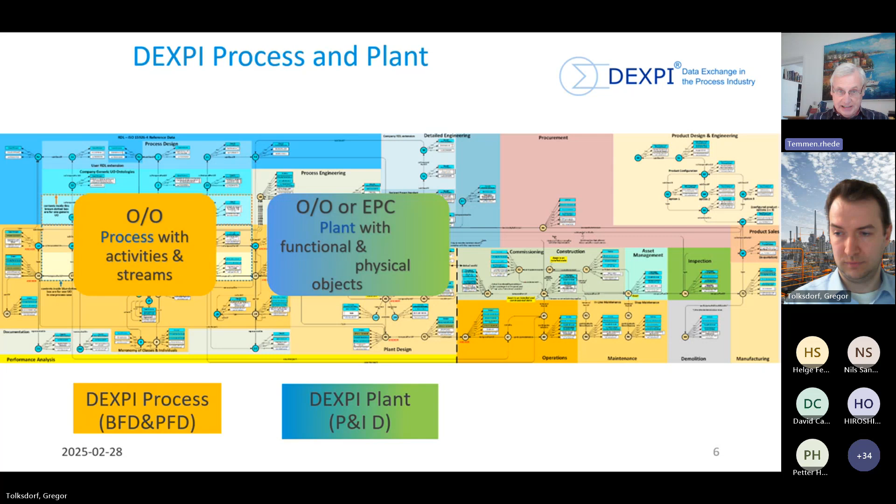Okay. That is what Gregor said, a view on the life cycle. That is a picture from the ISO 15926 colleagues, and perhaps Gregor, click. To the left, we see the process world with the activities and streams, and here we have the DEXPI process specification. In the middle, we have the plant world in a functional view and in green the physical view with our specification DEXPI plant for P&ID, where Gregor will make a deeper dive.

To the right, we have no DEXPI specification, but as Gregor said, we cover the whole life cycle. We have the world in purple of the assets, which were before products, and from the market we have the device vendors with their products and product models. That is our general view and the placement of the two DEXPI specifications.

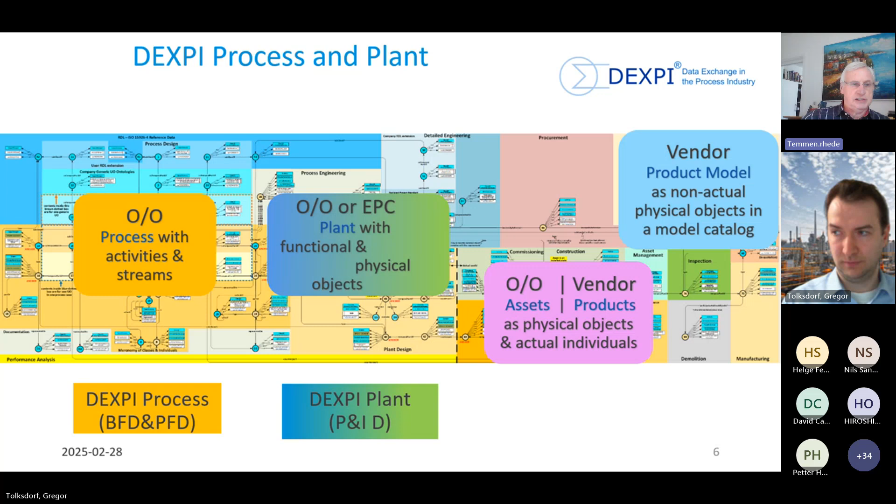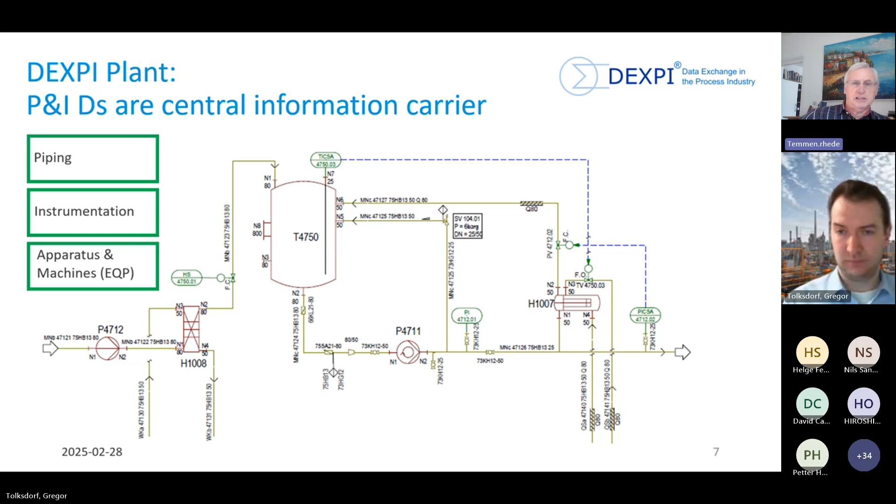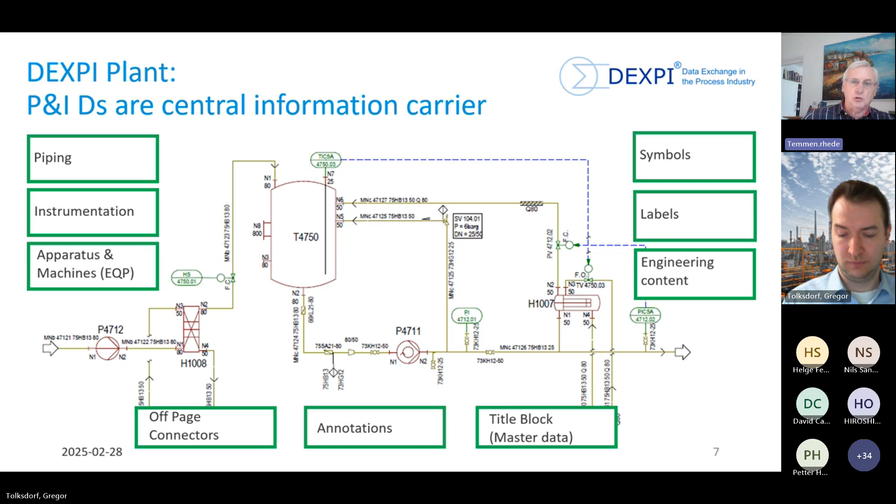On the next slide, it's a little recap of our world of the P&ID. Gregor, click perhaps. To the left, we have the three important topics: piping, instrumentation, and apparatus and machines. And we cover not only the world of the symbols and labels. The most important part is the engineering content with the taxonomy of the different parts, and of course the topology and the other stuff for P&ID at the bottom as well.

On the next slide, we see a little picture of the DEXPI process model. We cover here the block flow diagram and the process flow diagram with the new specification, and that is at the beginning of the life cycle, the process model, and to the right we hand it over to the plant model.

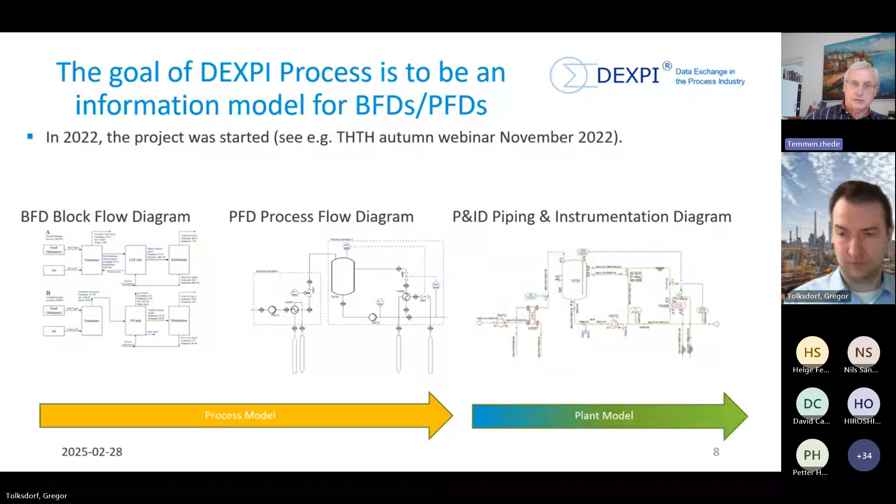And on the next slide we will see that this year these two specifications will be joined into one specification in the new release for, let's say, summer or fall this year. We will have a common specification that everyone can use, DEXPI Process and Plant together, or only one module of that. That's also included in the new specification, DEXPI 2.0.

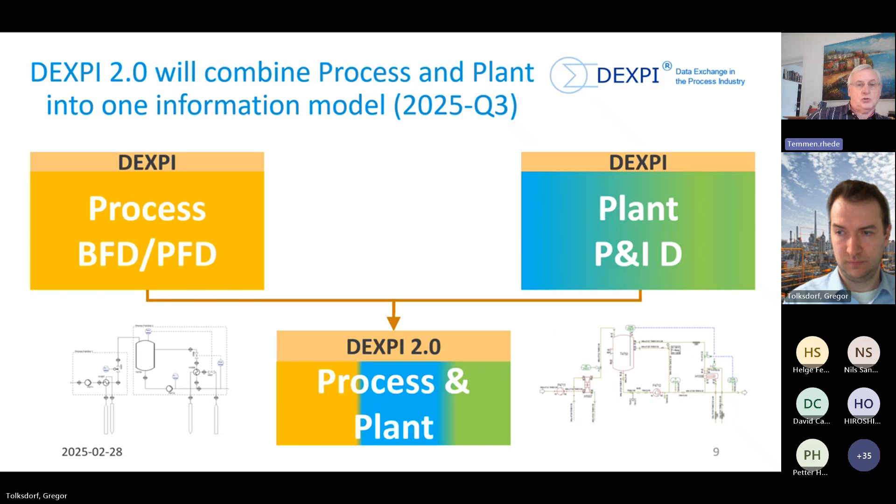And now let's have a look at the next slide on our alignment work. We heard in the last training sessions a lot about the different good approaches, perhaps from CFIHOS, from IDO itself, from DISC, IMF, or from STEP. And here we will show how DEXPI and CFIHOS work together.

We generated a common taxonomy for DEXPI Plant and for CFIHOS. That means if someone has a configuration from CFIHOS, he can switch over to DEXPI and vice versa. And let's go on the next slide a little bit more into the details.

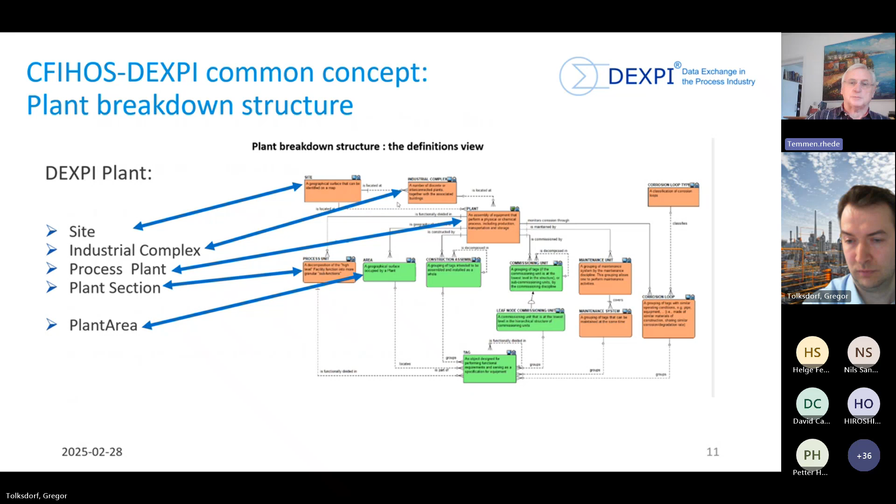With CFIHOS and DEXPI, we have a common breakdown structure. The important things are here on the slide: the site, the industrial complex, the process plant, the plant section, they call it process unit, only another name, and of course the plant area as well. And we have a system concept in both specifications as well. And we have common concepts.

Let's say we cover the same industry segment, the process industry, with a common view on the life cycle. We both use part 4 of ISO 15926 as primary RDL. We both cover concepts from ISO 14224, let's say the boundary concept as an important part and the maintainable item concept. We both use classifications instead of naming rules, and in both initiatives we have early involvement of the software vendors.

And in our first approach, we aligned these CFIHOS tags for apparatus, machines, piping and instrumentation into a common taxonomy with the DEXPI Plant specification. This one is ready, and the next step is verification of the DEXPI proposal by the CFIHOS team, and then we can publish the results, and we can use, as I said, this specification for use of both specifications, DEXPI and CFIHOS, in one software configuration, and we can switch from one to the other.

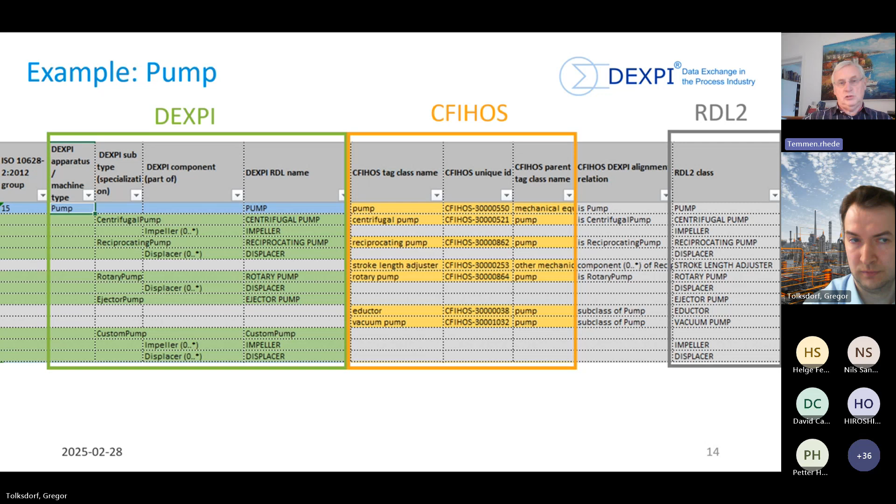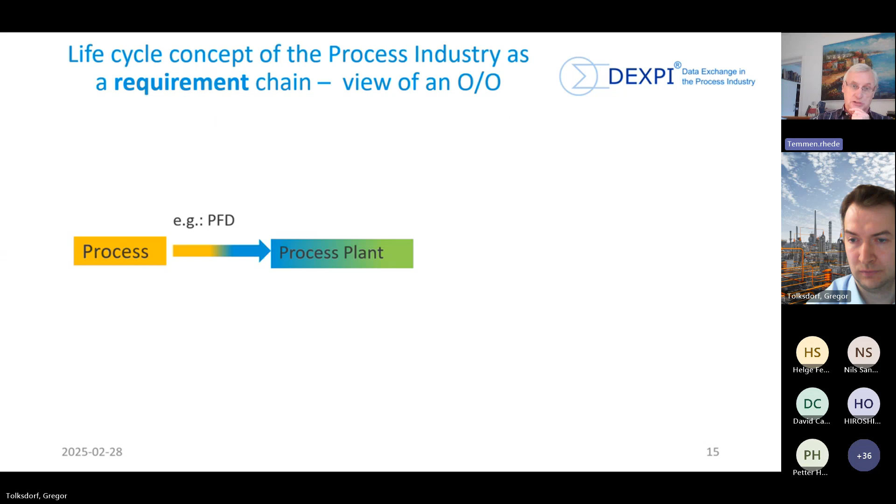And the next is perhaps a view on what the expectations are in the direction of IDO. This is a view on the life cycle as a requirement chain. We start with the process world, we then go to design the process plant, and later on we go with the specifications in the green color to the market and try to find the right products on the market. And if we have the right products, we buy these products, we inventory them as assets, and then we have the full life cycle as a requirement chain.

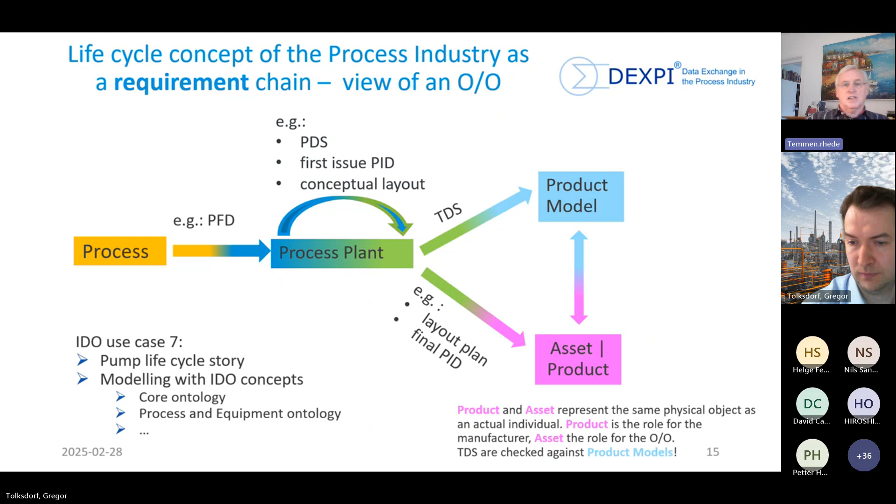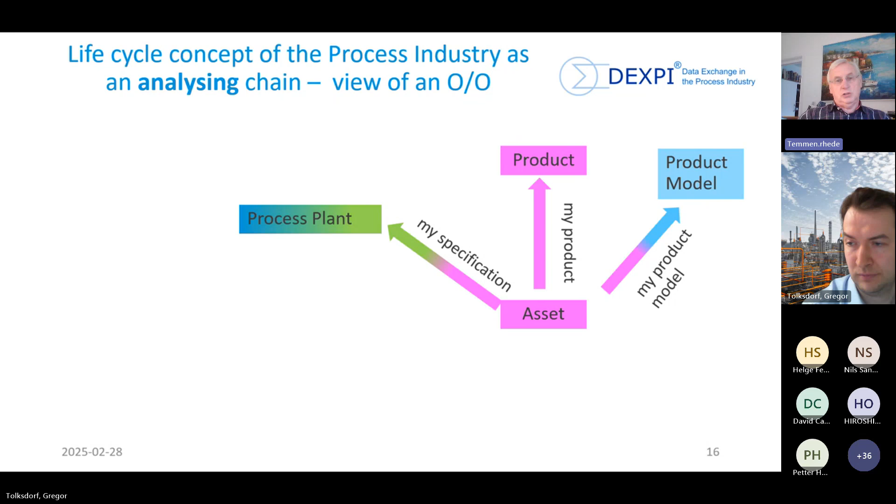And if we go vice versa, in the view of operating, we have it the other way around. And this is an analyzing chain. If something is wrong with an asset, we ask first, okay, which product was it? From which vendor did we buy that? Or which product model was it? And then we go back to our own specification from the process plant world. And if we go deeper back, then we can say, okay, what was my process?

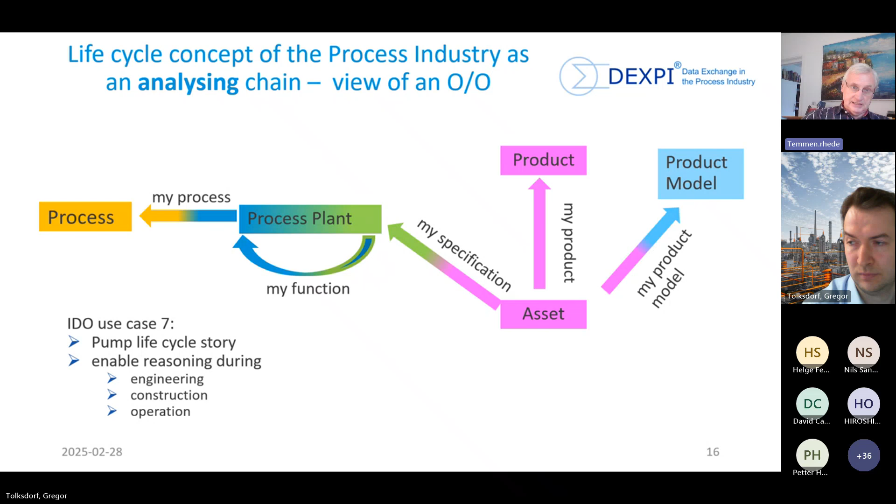And these two things, the requirement chain and the analyzing chain, are the things we try to cover with the IDO world. And we specified a use case 7. In this use case, we try to specify how IDO can cover this world of the life cycle view.

To the left, we see the process world, in the middle the process plant, and to the right the equipment or asset world. And if we have a look which specification is, we see, okay, we hope that in future IDO can cover this all.

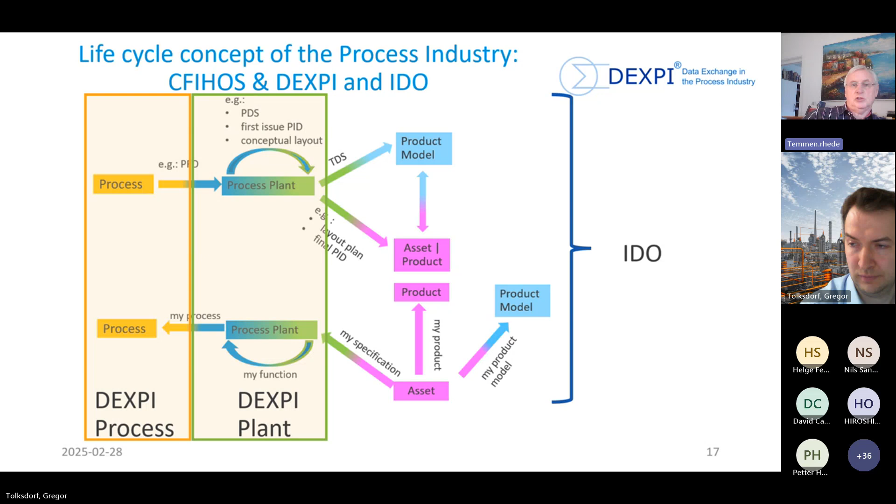To the left, we have the process world from DEXPI Process, in the middle from DEXPI Plant, and CFIHOS covers the tag world and the equipment world. That means the plant and the asset equipment world. And that is the part we try to cover with IDO in the view of DEXPI and CFIHOS.

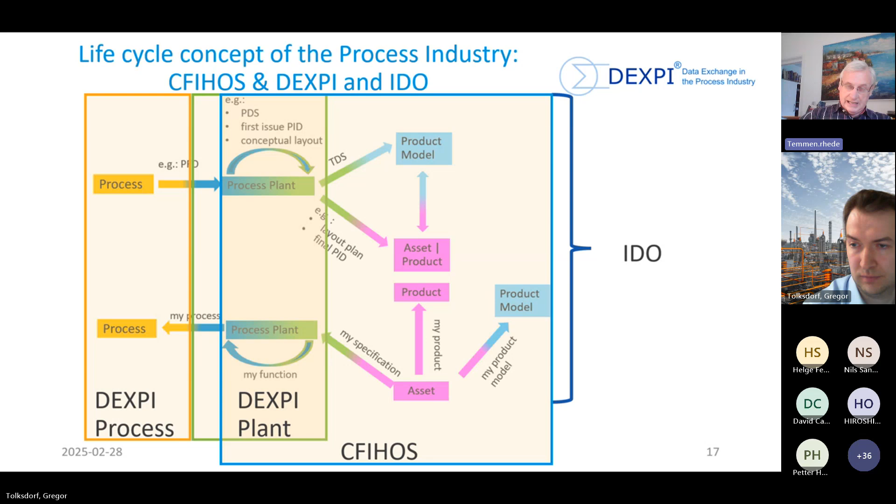And in the last training session, we heard something good about DISC and IMF. And if we had a look, we saw that the DISC colleagues had a view on the aspects function, plant, installed assets and products. Okay, that is the view from David. And I think here we have to answer the question, what are the relations to the process plant, to the asset, and to the product model. These things we have to bring into a common understanding.

I think that is important and we had questions after our last session. David has some questions, Torbjörn has some questions, how these things relate together. And I think that is a part we have to solve in the next weeks and months. That was a little view from my side, how we try to align all the different specifications we have here in the community, and especially in the view of the IDO training.

Back to you, Gregor. Yeah, thank you very much. I liked how you handled my slide update. Okay. Yeah, but we talked beforehand, so no issue.

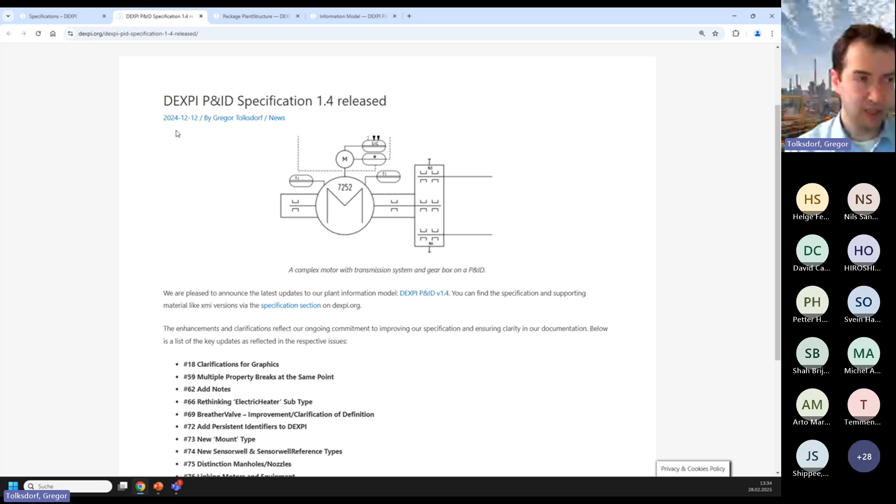What's the difference to DEXPI 1.3? Short answer, only little things. Some things are new. So when I go to the news of December, where we basically announced that we have released it, you can see what we did in the meantime. So since 2021, we had a working group of 10 to 20 people regularly meeting and addressing the topics that were brought up by the community. And each topic gets a unique ID or issue number, as you can see here with hashtags.

And more than 10, we discussed and came to a decision how to improve the specification, giving more clarification regarding graphics, adding a new concept for annotations or notes that are quite common, that do not address the engineering content as hard facts like a power of X kilowatt or a temperature of Y Kelvin, but giving guidance to the engineer. That is also a common concept of P&IDs, that you have notes to describe things that are not that standardized. Then improving some definitions, add persistent identifiers, add new concepts like a mount and sensor wells.

So different topics that came up from the community were discussed and included in the updated 1.4 version of the P&ID specification. For example, the primary element, the measuring element topic, where we realized in the meantime that the measuring element is a more appropriate name for what we use on P&IDs, and what we want to describe in the DEXPI information model. So that's basically how we do this.